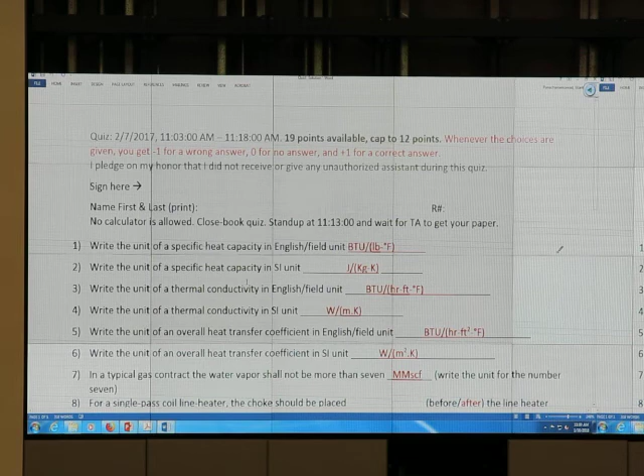Update: class material. I uploaded the quiz solution of last year on the blackboard. Okay, but that is last year's quiz. Let's go over it quickly.

Who wants to volunteer to answer any of this? Or I have a prize if you want to volunteer. It is a printout of the lecture notes, in color, 4 per page. Some of you cannot print it like this. No one wants it? Volunteer, who wants to volunteer? No one? You printed out everything already? Or what? Well, let me read it.

So the unit that I have, heat capacity, BTU per pound Fahrenheit. Of course, this was asked last year, and this was closed book. Okay, Joule per kilogram Kelvin. Anyone haven't memorized that yet? So everyone memorized it already, right?

And we have unit of thermal conductivity in English and in SI, overall heat transfer coefficient unit. I just asked about the unit. Gas contract, water vapor shall not be more than 7. What unit? Pound per MMscf actually.

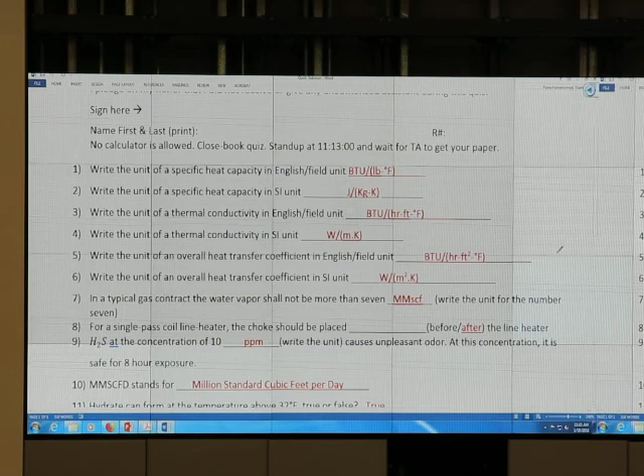For single pass coil, line heater, the choke should be placed before or after the line heater. You know that, right? It has to be after. H2S concentration of 10 ppm. Read it, okay? And this is a calculation.

If you can do this, I hope that you can do this year's quiz. It may be on this Thursday, or may not be on this Thursday. I don't tell you, okay?

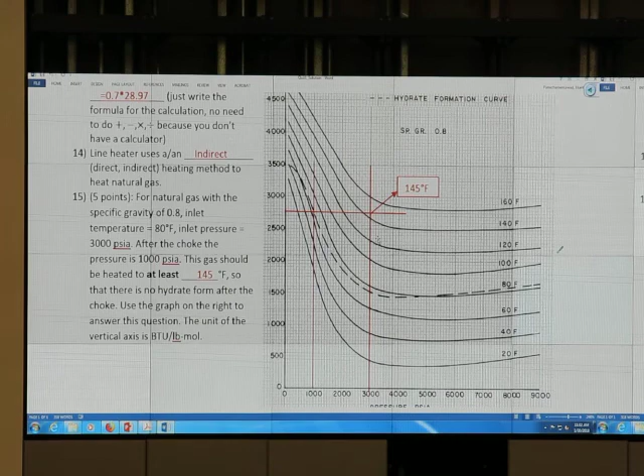Okay, next thing is about how many of you missed the first day of class, or first day of class with university. Everyone have university excuse, raise your hand: 1, 2, 3, 4, 5. Oh, more than about 10.

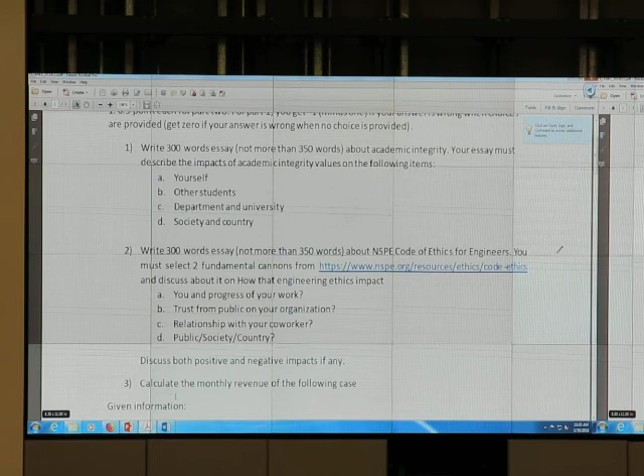So you may miss the talk. Did you watch the video? Did you miss and you watch the video? Okay, so I have a question.

If I know about any academic misconduct, what do I do? What did I promise you that I will do? What's your name? I have this. Okay, you want it? Okay.

What do I promise that I will do for the case of academic misconduct? Is there any particular number that I will call? Do I tell your dad or something? Or I call? No. If there's an academic misconduct happen, what do I do? What is my promise to you? I will tell office of what? Student something? Office of Student Conduct. Okay, that's what I promise that I will do.

Solution for homework number 1. Okay, for those of you who missed the first day of class, like 10 plus people, we have just 80 people, so 1/8 of the people. If you haven't listened to it, please go back and open the video and listen to that.

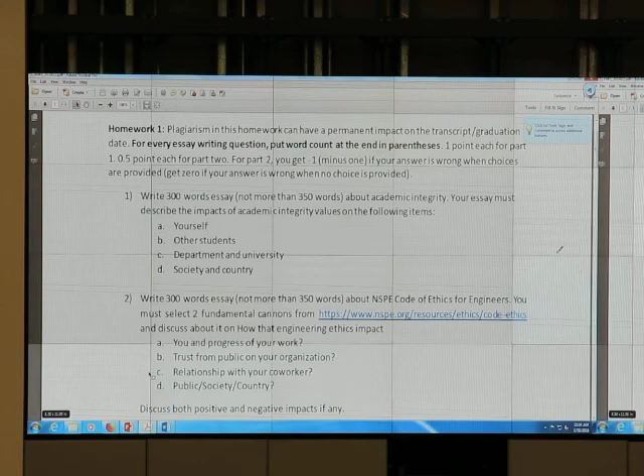Okay, the homework has 2 parts, right? The part that is about writing, we don't give you the solution, okay, but you should know. 300 word essay about academic integrity. Essay must describe the impact of academic integrity value on the following item.

Who finished this one already? You ready to get a gift? Who finished this? Hey Tolani, give the rest for those who raised their hand, okay?

Okay, what's your answer? So who raised their hand? Who wants the gift? Give it to them, Tolani, okay?

So if I participate in academic misconduct, well, I might not learn the information, and then I might get a job, maybe, and then I'll get fired because I don't know what I need to do because I cheated. But I could hurt somebody. Yeah, because my design was messed up or something like that.

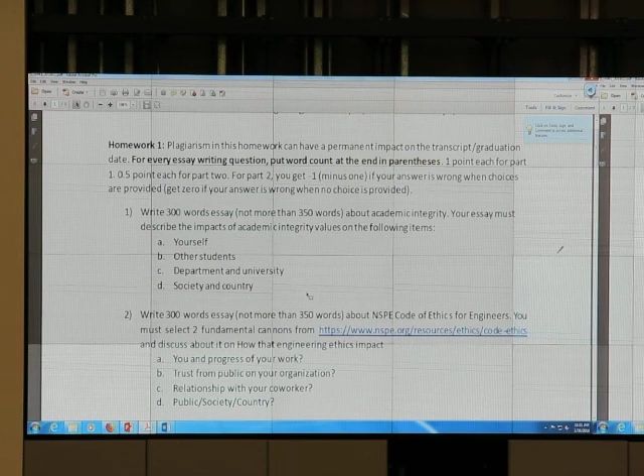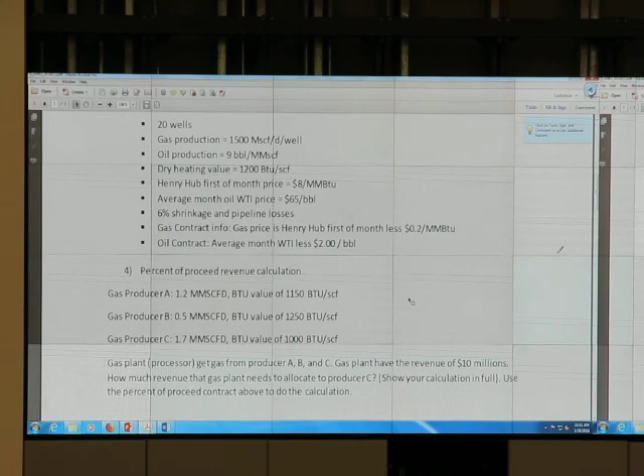Not this one. I upload it, and if you're interested in this, or you want to check it, you can check it. 2015 exam is not 2018, right? 2015 is the exam, it's old. It won't be the same. But if you can do that one, I think you can do this one too. But hopefully, okay, hopefully.

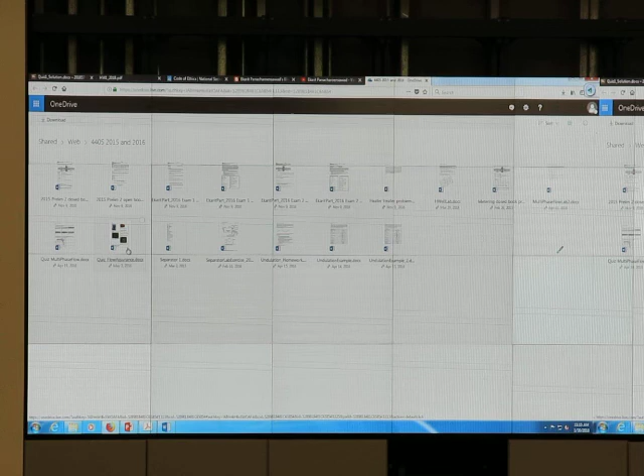That's all about the class material. Any questions? No question? Yes, question - are you going to put those materials on the blackboard? This material is not on the blackboard. It's on my website, available free of charge for everyone who goes to my website. Thank you. There's a link from the TT website profile page, or you can go to egrid.blogspot.com.

Just type my name, Ekarit Panacharoensawad, and you'll get this. It has material for other courses I taught, like numerical methods in Python, multi-phase flow in Python, flow assurance, another multi-phase flow course, and C++, whatever you want.

I don't worry that you know too much about our exam - that's the point, you know how to do it. And I promise you the new exam will be as hard as it should be. It won't be too hard.

For video lectures, you can Google my name on YouTube and find previous lectures - last year's facility class, numerical methods, multi-phase flow, and so on. That's if you're interested, but you shouldn't need to, because you come to class, right?

Who missed class already? Tolani, how many students do we have in this room? I haven't counted it. Oh, count it.

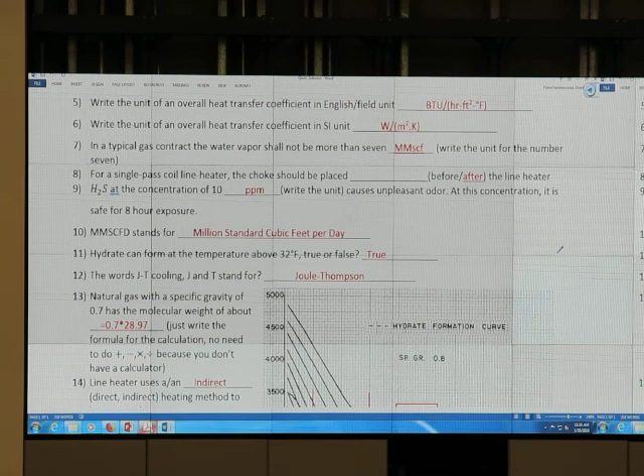Today, other than telling you about the homework solution and the exam and quiz, we will try to finish the gas density, the hydrate part.

Next time, if we have a quiz and you cannot do it, it's on you, okay? I'm not responsible for that. Are you going to be ready for the next quiz, if it's on Thursday?

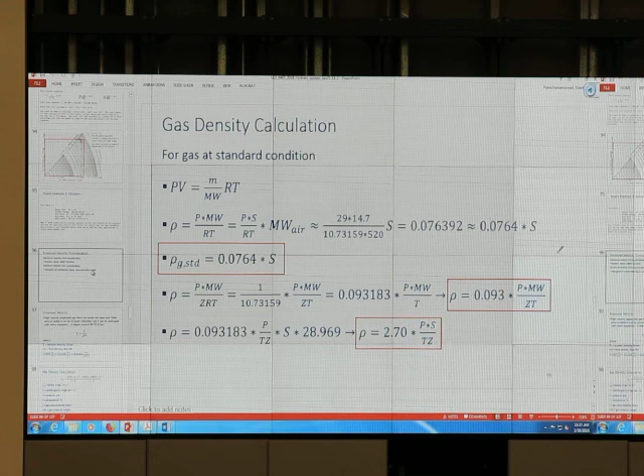Oh, tomorrow when you go to the lab, bring safety glasses. Who doesn't know when to go to the lab tomorrow? If you don't know, come see me after class. There are 3 sessions, and you should enroll in one at 1:50, one at 2:50, and one at 4:50 or something. If you don't know which session to go to, come see me after class.

Who downloaded Sivalls textbook already? None of you? Did you all download Sivalls textbook? Come on. William W. Esther, did you download the material from the website? Sivalls textbook - why not? Do you know where it is? You didn't do it? Paul E.

Everett, did you download the material? Yes. Did you? Is it good? Yeah. Ivan Garcia, did you download the material from the blackboard? You will, right? At least for the quiz, right?

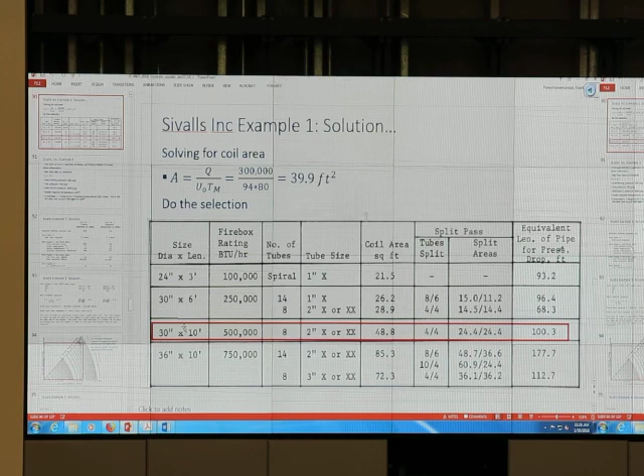Okay, let's finish this one. So about hydrate, we prevent it by putting in a line heater. One thing to mention about choking.

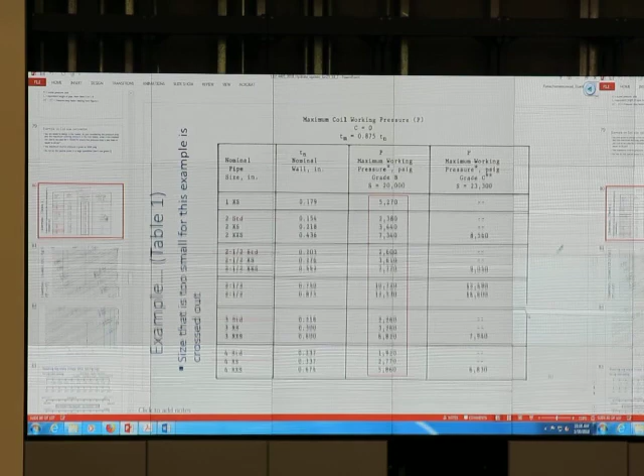We can choke a little bit at the wellhead. On the wellhead itself, like what you see outdoors, we can choke it, but not too much. When we choke it at the wellhead, we will have some pressure drop, so we can use a thinner pipe, a lower pressure rating pipe.

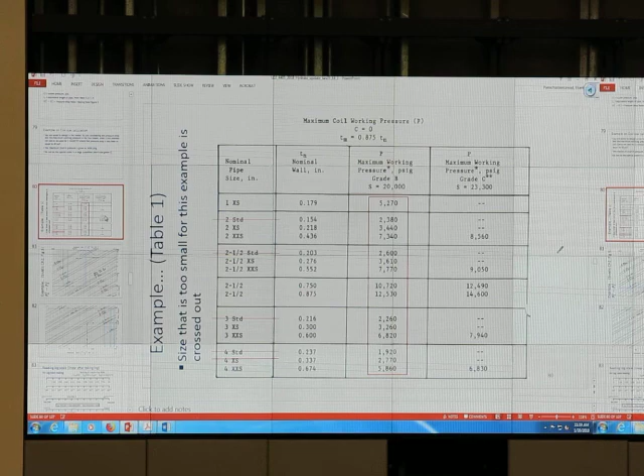The reason we don't want to choke it too much at the wellhead is we don't want to form hydrate. So we choke a little bit at the wellhead, and we will choke more later on. Before we choke a lot, what do we put? A line heater, right? So that's why one of the questions last year was about the location of the line heater.

For a single-pass coil line heater, the choke should be placed after the line heater, okay? Mr. Bulat, would you like to add something more on choking at the wellhead, for those who missed it, or are you fine? Okay, let's continue.

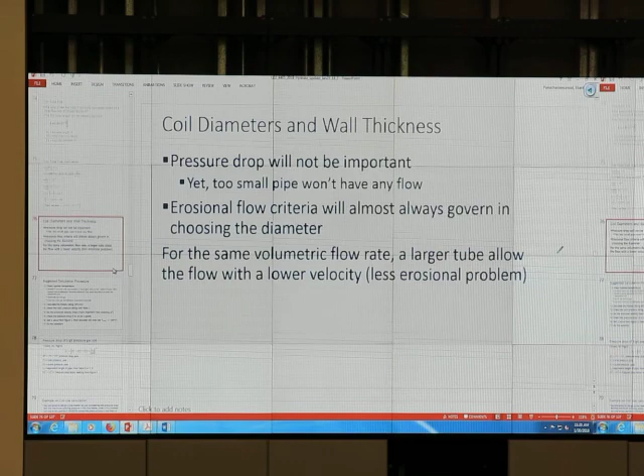Log mean temperature difference. Today we will try to cover every calculation of line heater. For log mean temperature difference, I did not give you the derivation. There's a derivation based on the heat balance, but at the end, this is what you get.

Log mean temperature difference: greatest difference minus lowest difference, divided by the natural log of that ratio.

I think four years ago, a student asked me what is the difference between Ln and Log. Do you know that? Brandon L. Gillespie, hi Brandon, what is the difference between Ln and Log? Both are log. Log is log based what? Which one is natural log? Yes, everyone should know, right? But I got the question during the exam. What I tell him is, I don't tell you anything anymore. So you should know that.

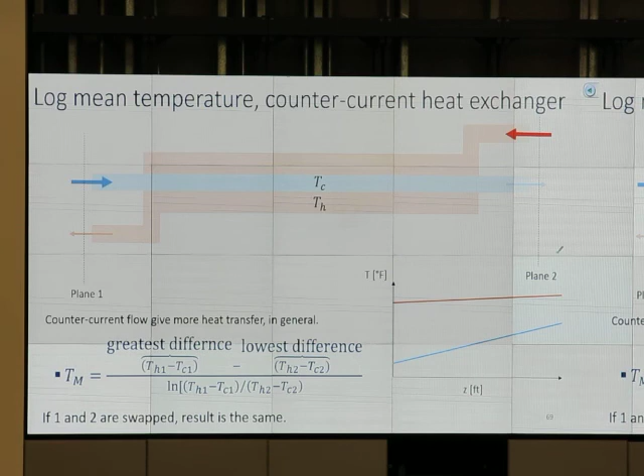Take a look at the formula. Does the formula stay the same or change? Is it the same? Yes, it is. The formula works whether you put it in the opposite direction or in the same direction. So you can use the log mean temperature difference regardless of whether you flow counter current or co-current.

This equation means that if we flow faster, we need more heat. If we require more enthalpy change, we need more heat.

One more thing, I uploaded a larger version on the blackboard. You will see a larger version. Here's a GPSA book where the chart comes from, two of them, $100. It's the book where the chart comes from, and we don't have any. I didn't upload it yet. It's a larger version of the graph.

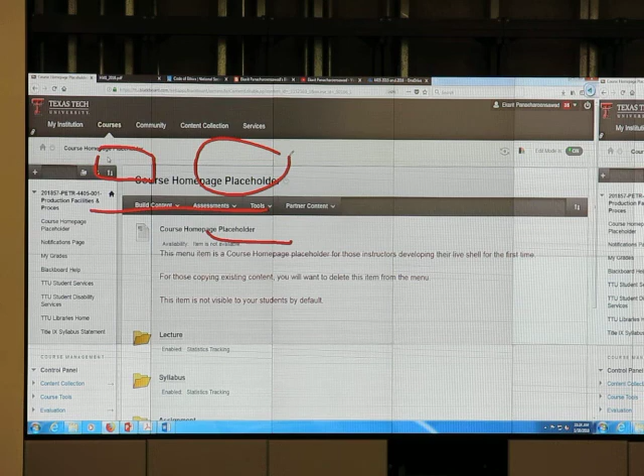I want to show you the bigger one. It's not fun.

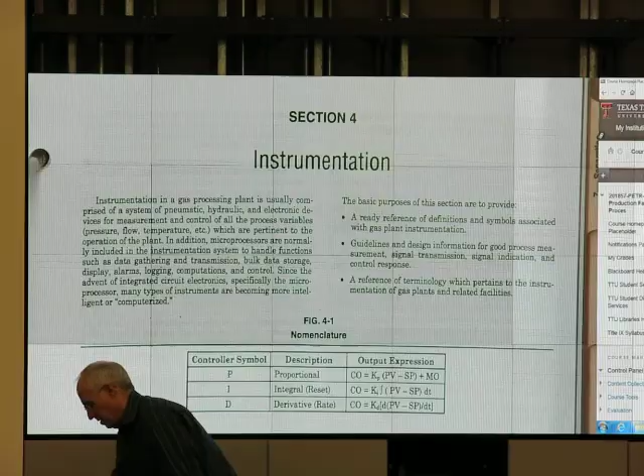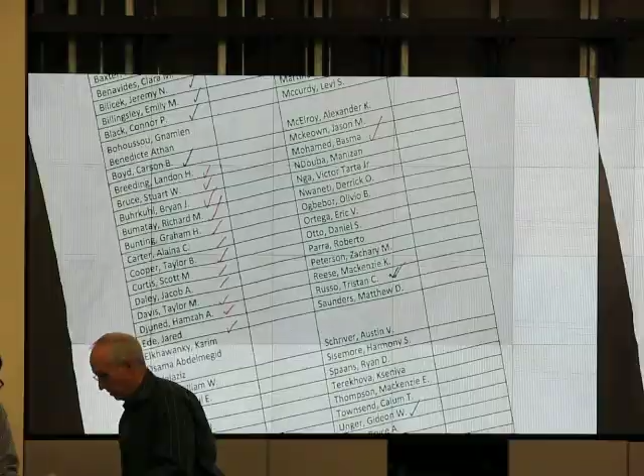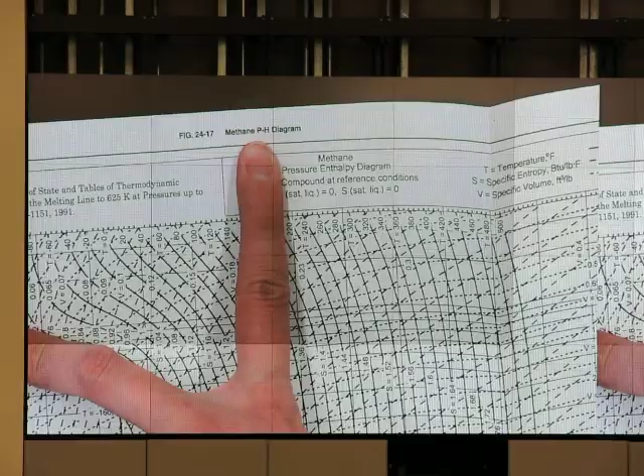For methane, it looks like this, right? Very big, the methane pressure enthalpy diagram. The one that I showed you in the slide is kind of small. So if you use this one, we have pressure over here, constant temperature line, the S curve. The one here is 0 Fahrenheit, and on the left is a minus sign, minus something. On the right is bigger. So we have this curve, and this axis is the enthalpy.

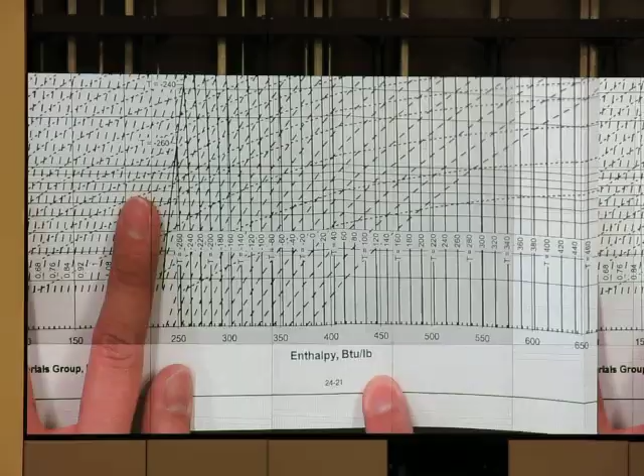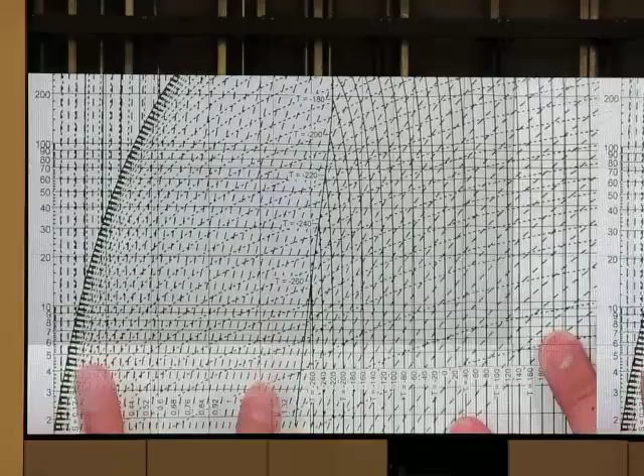If we have a constant enthalpy when we flow through a choke, we just drop like that, right? And then we can read temperature and pressure. On this part, I think this is the area of two-phase, the phase envelope.

Okay, the actual chart is bigger. When you go to work, if you need it, your employer may provide it for you, or just buy it, $100, is it? Or maybe more.

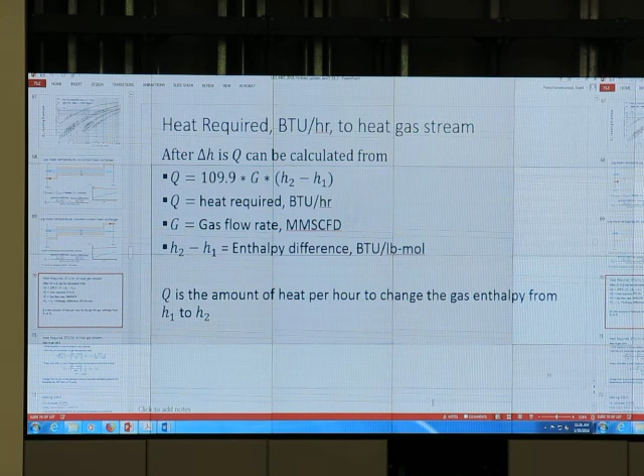Once we get that from the chart, we get the h, right? And G is just how fast we flow. If we require the same BTU per pound mole, but we flow faster, means more pound mole per hour. So if we flow faster, we need more heat.

Where does that come from? Is that constant? To do what, unit conversion, conversion constant? Yes, 109.9 is just unit conversion. If you notice, left hand side is BTU per hour, that's the unit. What about right hand side? G is mmSCFD, H is BTU per pound mole. The unit of left hand side and right hand side must be the same, but if you use just this, they're not the same. So that's why we need some kind of unit conversion factor.

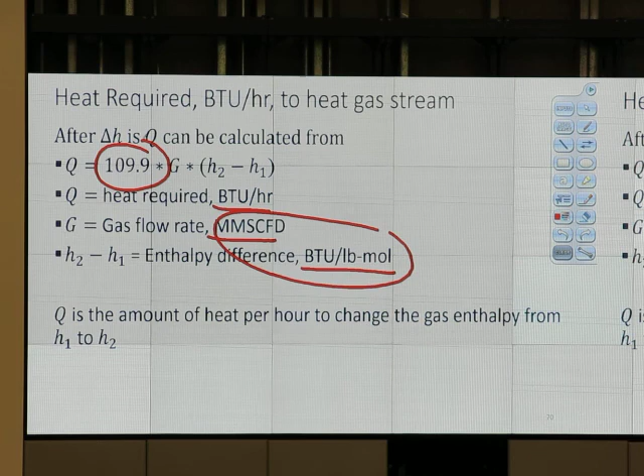If not last year, the year before, one of my questions was asking how do we get 109.9? Please derive it, and if you don't get 109.9, you don't get much score. This is the calculation part. Any clue?

Kai Harrington? Hi Kai, how do we get 109.9? How do we do the calculation? Can you tell me the procedure? You cancel out pound mole and SCF, so like BTU per day and per day. So you know how to do it?

Maybe. One of the senior professors told me senior students don't need to know anything anymore about unit conversion, it's just asked in the exam and you'll be able to do it automatically. Okay Kai, if I ask you just in the exam, will you be able to do it automatically? No? Okay, let's talk about it more.

The trick is we need to start with something consistent, we put the unit in. The step to get 109.9: we write the equation, and G I put as pound mole per hour. In this formula G is mmSCFD, but I don't care what G is labeled as. Is it volumetric flow rate? No, not quite. Even though it's mmSCFD, it's more like mass flow rate. Do you know why? Because it has this S, standard condition.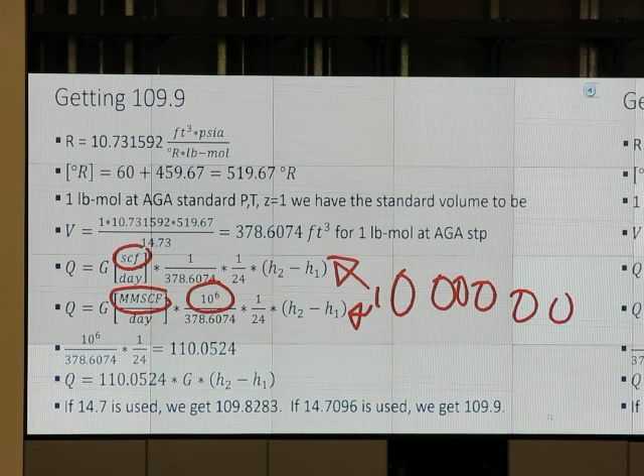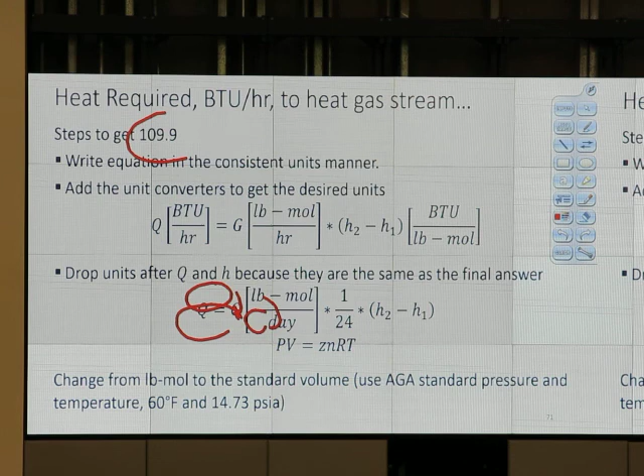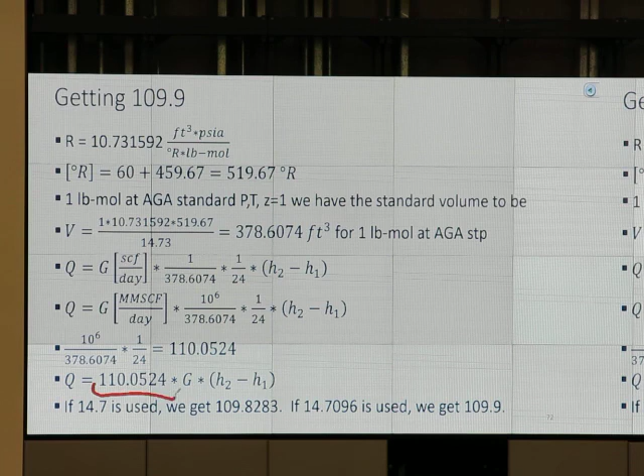One common mistake, not from you but from previous year students, is they do something similar to this, exactly the same, except they flip everything. Instead of 1 million on the top, they put it on the bottom. Instead of 24 on the bottom, they put it on the top. They flip everything, and the answer is, of course, wrong. They won't get 109, they get something else. So you may think this is very easy, and it is easy, but please practice, because if you flip everything and your answer is wrong, you get 0. I will be happy to give you 0, nothing else. So practice. By doing that, I get 110, not quite 109, but close enough, okay?

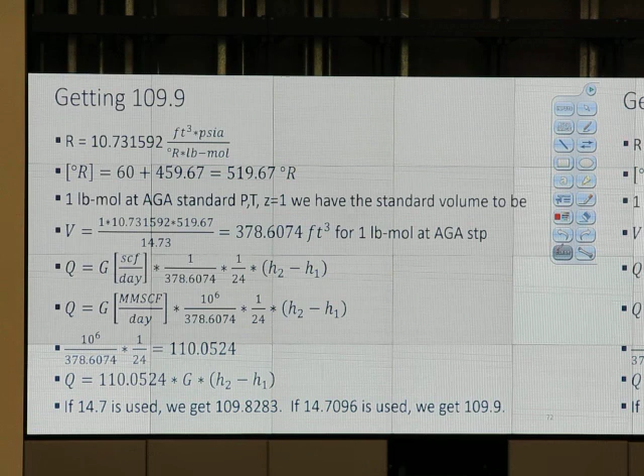Kai, now can you do it? Can you do similar unit conversion? I'll ask you later, okay, there are several more.

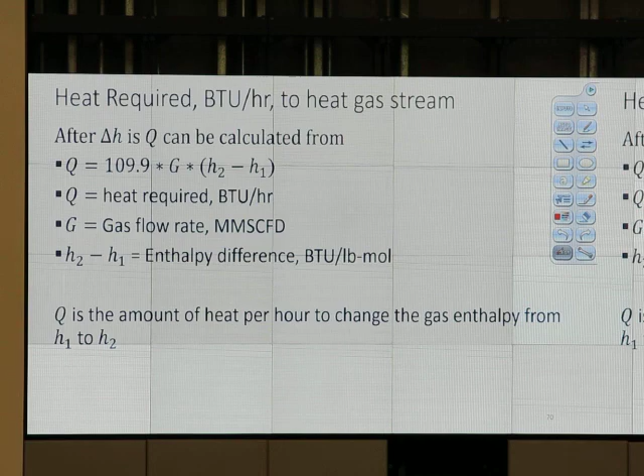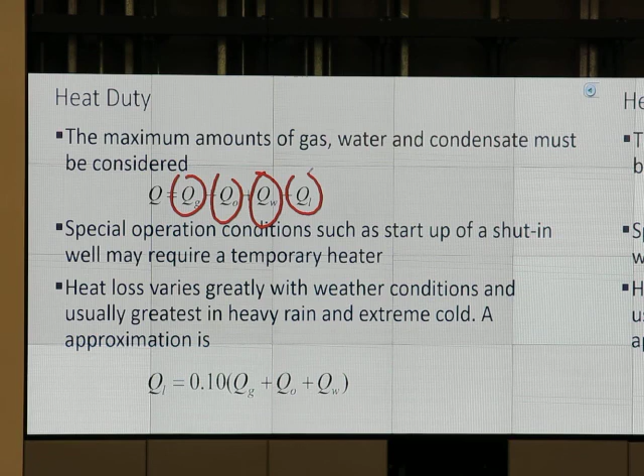Heat duty. After we know the amount of heat required, based on the change in enthalpy, the change in enthalpy tells us from the Mollier diagram, from the chart. And G is the flow rate. When we calculate total heat, maximum amount of gas, water, and condensate must be considered. We may not just have gas, we may have oil, we may have water, and we may have heat loss. Special operation conditions such as startup of a shut-in well may require a temporary heater.

Once we know the heat required, we can do more calculation on the fire tube size. We use this number, 10,000 BTU per hour per square foot, to approximate the area of fire tube required. Area of fire tube required, we can use this formula: fire tube length equals that number multiplied by Q over D, where Q is BTU per hour and fire tube diameter is in inches.

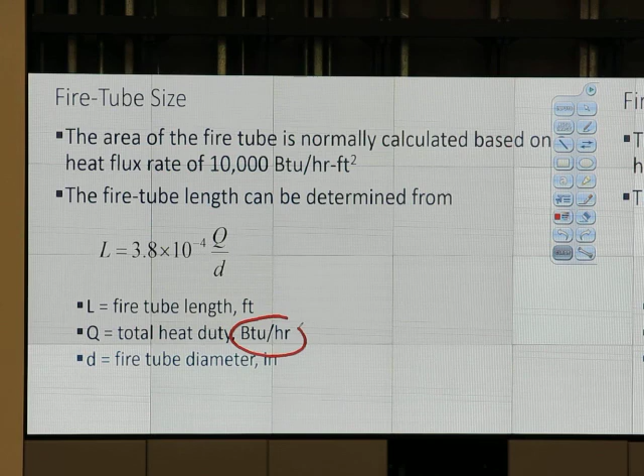Where does this number come from, Kai? It's unit conversion plus a little bit more, I think. So Q is BTU per hour, right? Did I show that? Yes. So Q is BTU per hour. How come we have this? Length multiplied by diameter gives me what? Kind of an area, right? But it's not quite area because we have a cylinder shape like this, so the area on this part is not just L multiplied by D, it's something else.

Let's briefly take a look at the derivation. I have heat flux, small q, which is heat per unit time per unit area, that's heat flux. So Q, which is BTU per hour, divided by area. Area of the surface on this side of the cylinder is what? Pi. So the circumference is pi times d multiplied by L, but since diameter is in units of inch, we have to divide it by 12. So this is the surface area.

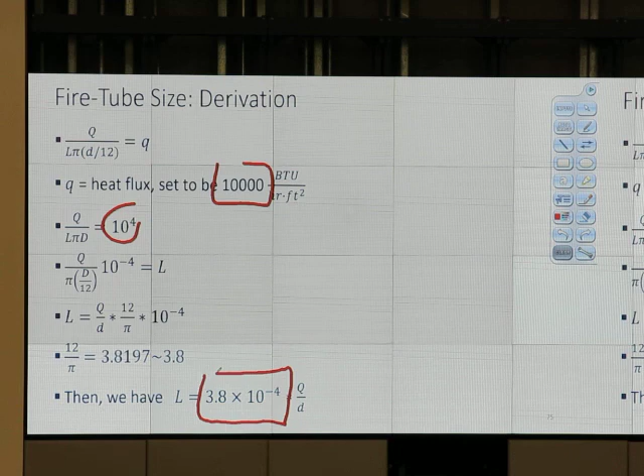Heat per time per unit area equals heat flux, that's what it is. We assume that the heat flux of the fire tube is 10,000. If we put 10,000 into that and do the math, we get that number. So that number didn't just pop up out of nowhere, there's some reason behind it. After we finish this, I'll tell you why we don't have to worry too much about the derivation and all the calculation. So now you can calculate the length, the length of the fire tube. We know what kind of tube diameter we are going to use.

Pressure drop can be a problem. You remember the picture? This picture, we have several of the coils. What should be the size? How big should it be? Suleiman Hasanov, if I have a big pipe and a small pipe, which one is more expensive? More expensive, small or big?

Would you like to change your answer? Being opposite - if I give you a very small pipe and a big pipe, the big pipe will be more expensive because it has more material and it's a lot more difficult to make. I won't ask this on the exam, but you should know a big pipe is more expensive than a small pipe. The reason we have a bigger pipe is to reduce pressure drop and have slow movement - not too slow, but slow enough of gas inside so we can prevent erosion. We don't want the velocity inside the pipe to exceed the erosional velocity. If we make it big with the same volumetric flow rate, it will be slower. So big pipe is more expensive than small pipe.

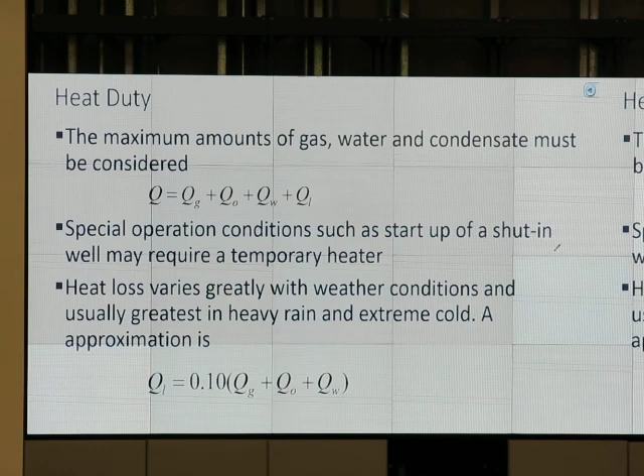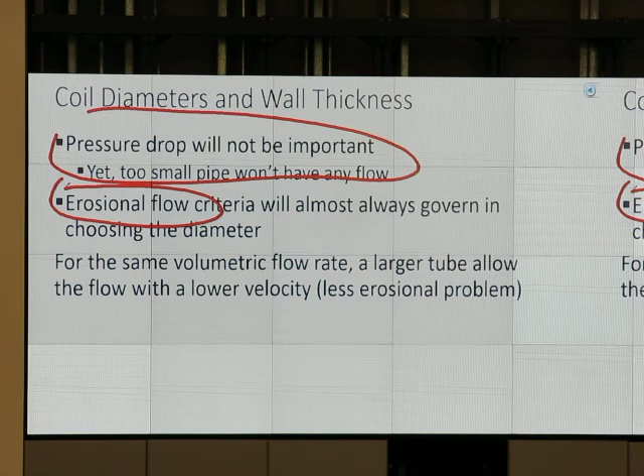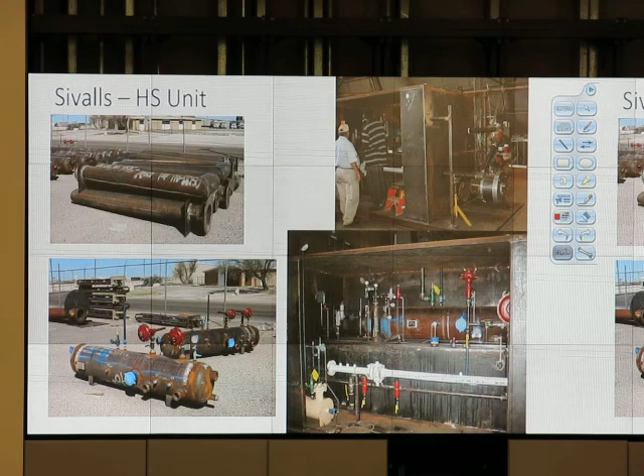So we have to take a look at the pressure drop consideration. We have to look at erosional flow, erosional velocity. If we have a little bit of some particle inside moving too fast, it can erode the pipe. So we need to determine the size, calculate the pressure drop, and of course it links to the length. Also the pressure rating - the pressure rating for the pipe, for this coil, should be rated for the maximum pressure in your system, which is the well shut-in pressure. You still remember, right?

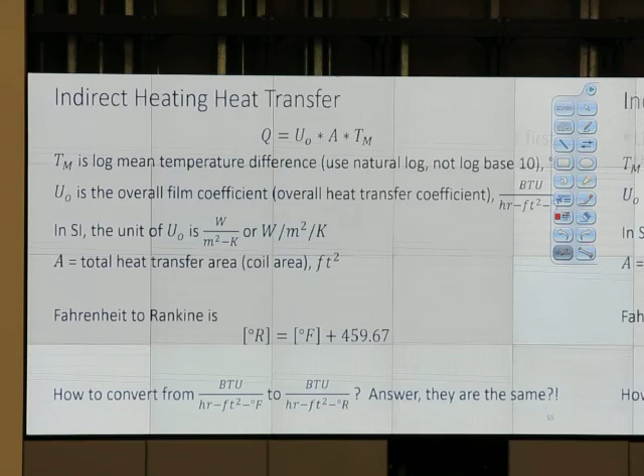So the pressure rating will tell us how thick the pipe should be. Should it be schedule 40? Should it be schedule 80, or what? Okay, here's the calculation procedure.

Number one, to select the line heater, we check the hydrate temperature and decide if cast iron coil is needed or steel pipe coil is okay. Do we use an indirect heater or what? Or we don't even need to put a heater. If your gas is already hot, in summer, we may not put a line heater - we may put the line heater later on.

An indirect heater can be placed in the flow line ahead of the free water knockout to assist the separation - you can heat it up a little bit to enhance the separation. We need to check: use steel coil for gas, or cast iron coil for oil and water. So if we have just gas, use steel coil, but if we have oil or water in it, we may use cast iron so we don't have the problem of corrosion.

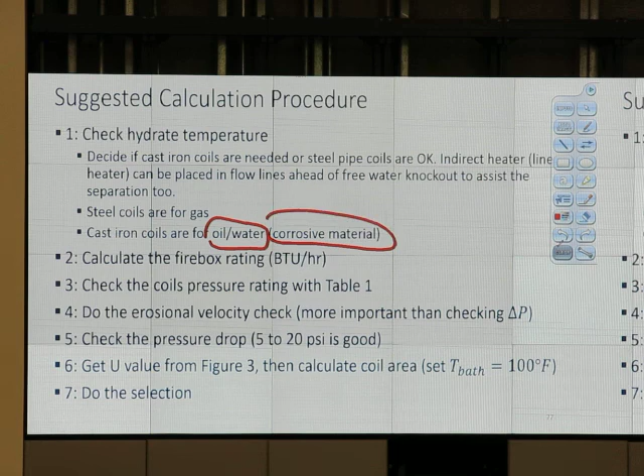So the first step is just checking the hydrate curve and the pipe material we should use, and you can check the pressure rating. Second step is calculate the firebox rating in BTU per hour: 109.9 multiplied by G multiplied by delta H, this one, right? And then we get L equal to something something.

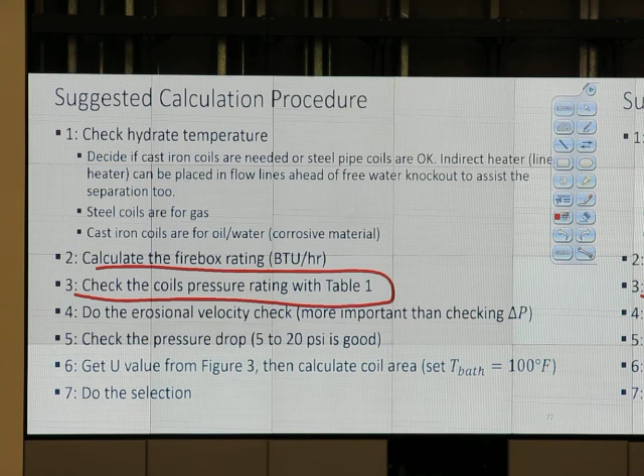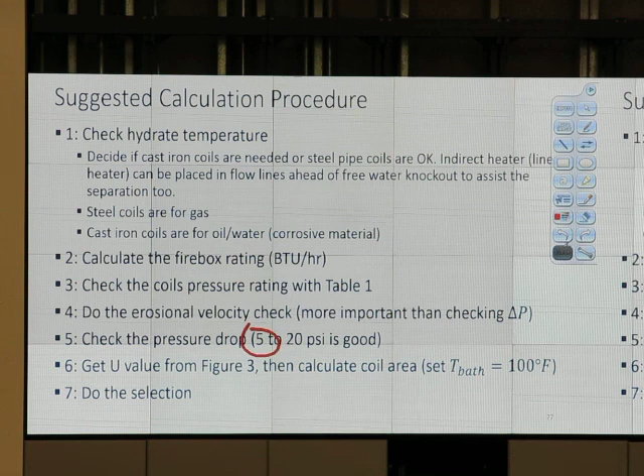Check the coil pressure rating. Do the erosional velocity check. Check the pressure drop in the coil - pressure drop in the coil should be 5 to 20 psi, not more than that. If it's a lot lower than 5, this means the pipe may be too big, too expensive, but it works anyway. Get the U value from figure 3, then calculate the coil area, set the temperature equal to 100 Fahrenheit, do the selection - that's figure 3.

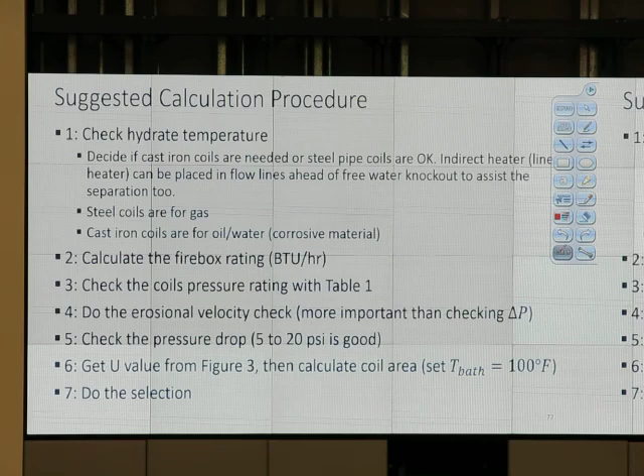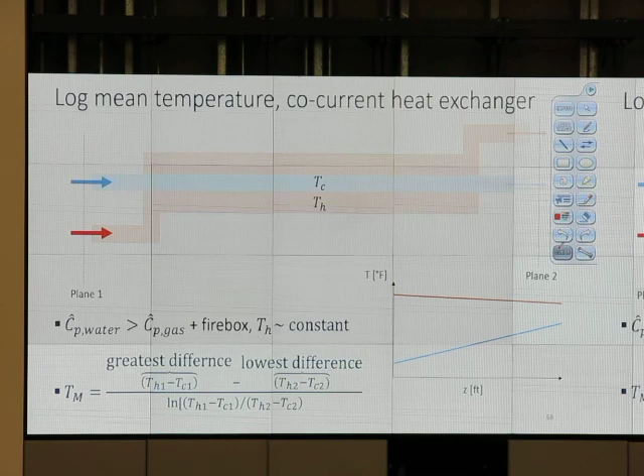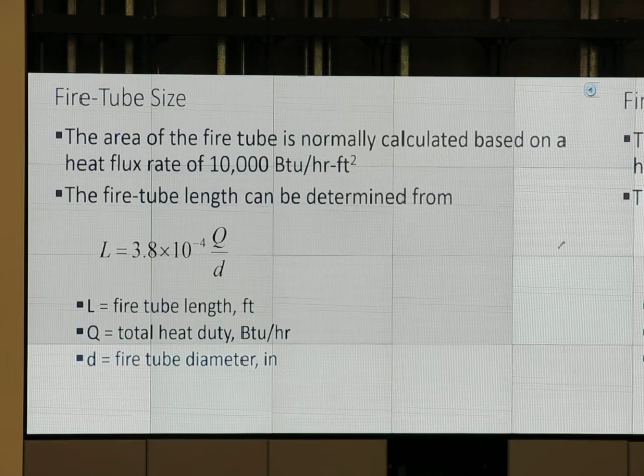So basically, typically when we do pressure drop in pipe calculations, first we calculate Reynolds number, right? From Reynolds number we know if it's turbulent or laminar. Then we calculate the friction factor, whether using the Moody diagram or just 64 over Reynolds number. Then we can calculate frictional pressure loss, fLV squared over D - that's the pressure drop in the pipe. And we calculate pressure drop due to elevation, pressure drop due to any bend, any joint. Did you study this? You've already done it many times, right?

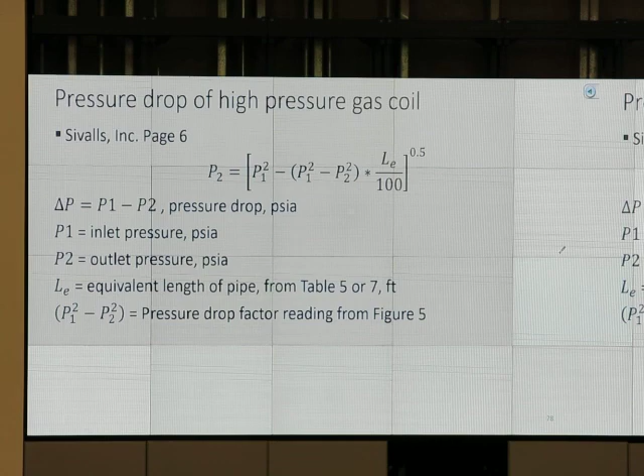For the case of gas, when we have pressure drop, the temperature changes, correct? When temperature changes, density changes. Reynolds number is what? What is the formula for Reynolds number?